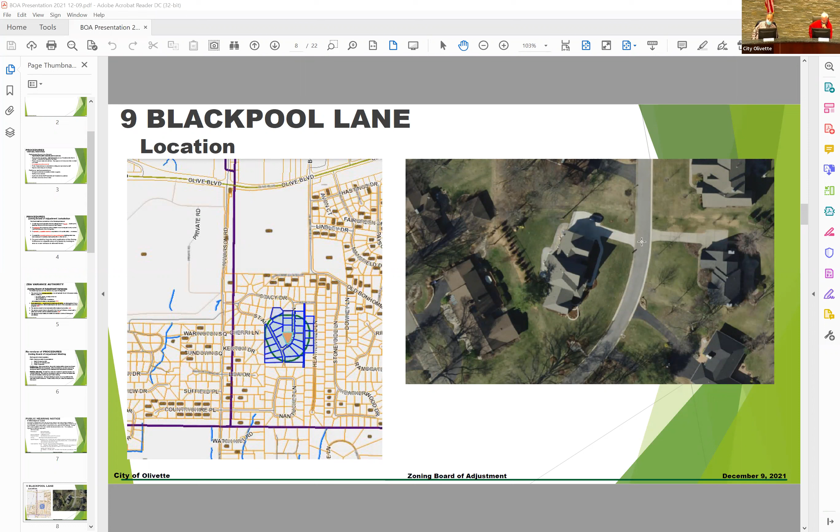We received a building permit application for the construction of an in-ground pool and some other improvements in the rear property. When reviewing the in-ground pool based on the calculations for the required side yard setback, the pool has to meet the setbacks applied to all structures on the property, whether flat or three-dimensional.

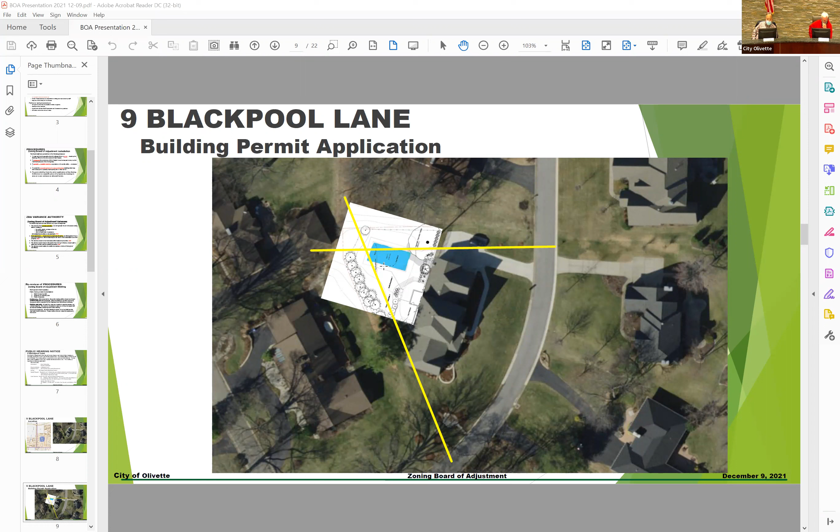So, giving an overview of why the city denied the pool permit request: the property is zoned single family residential district, and the intent and purpose of that district is for single family uses. But there are some definitions that are important in the evaluation.

One is setbacks, defined under Article 2 definitions within Chapter 400 zoning regulations. A setback is a requirement for where a building or structure may be placed on a lot, establishing a distance from the front, side, and rear lot lines. The land area within the setback establishes yard areas kept free of buildings and structures. It is also referred to as setback requirement or setback line.

Within a setback there is a side yard, which is the linear setback from the side lot line established in the underlying zoning district, in this case SR. Unless noted otherwise, no building or structure is generally permitted in the side yard setback.

Another definition worth noting is lot width, because we use the lot width to determine the size of the side yard setback. On an interior lot, the lot width is the horizontal distance between the side lot lines measured along the established building line from the front lot line. On a corner lot, you use the shortest distance to determine the front yard, using the distance between the side lot line and the street to make that determination.

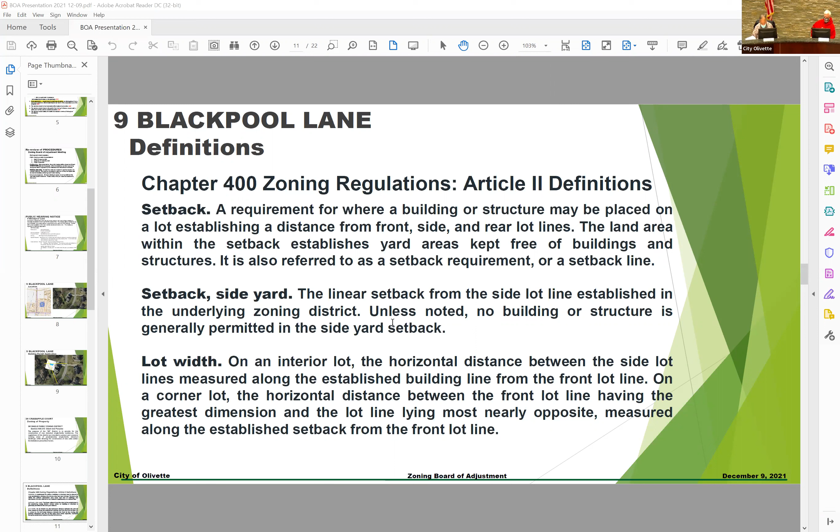In this case, this is not a corner lot, even though it has a configuration that may reflect that. When I measure the lot width, I measure along the front building line from property line to property line, and we'll show you a little illustration that identifies that, as required by code.

The sections applied when we assessed the pool are section 400-260, the yard and setback requirements. The minimum side yard setback is 12% of the lot width. For pools, which are considered accessory structures, the side yard should be no further than the side yard setback of that lot.

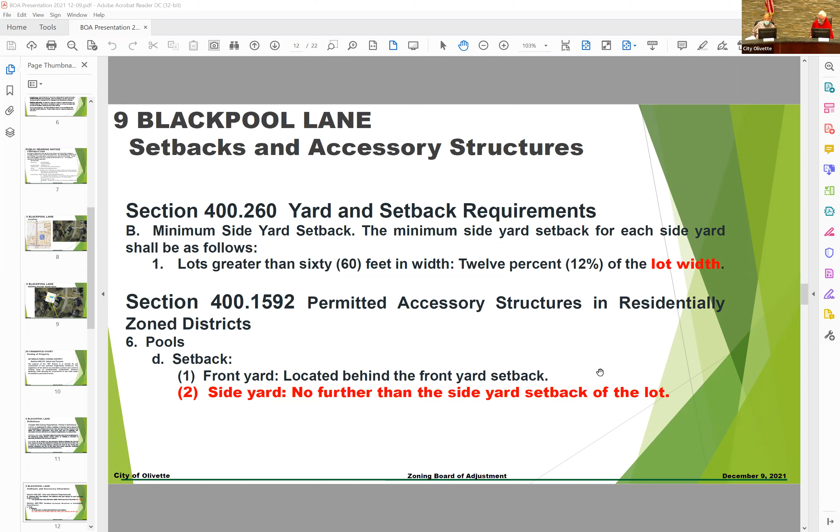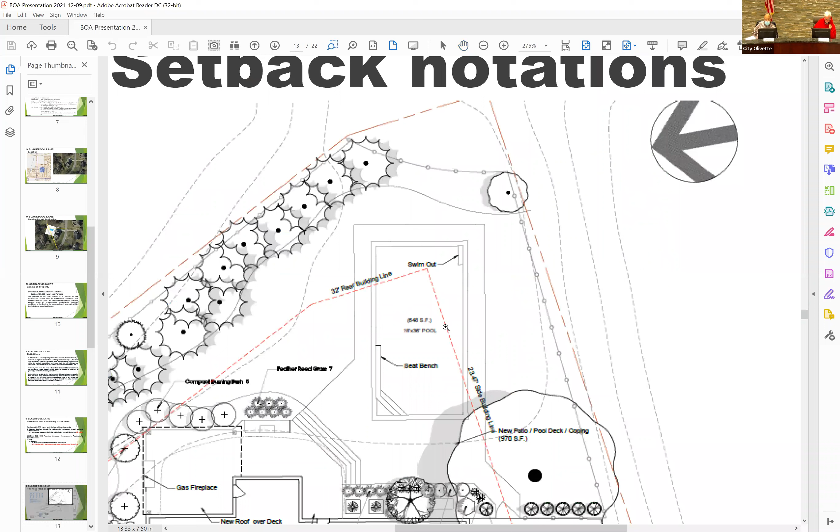Then you'll see these red lot lines that represent the setbacks, and you can see how that pool falls within the calculated setbacks here for these side lot lines. That being said, staff did not have authority or any authorization to issue the building permit to allow the pool to encroach into that setback area.

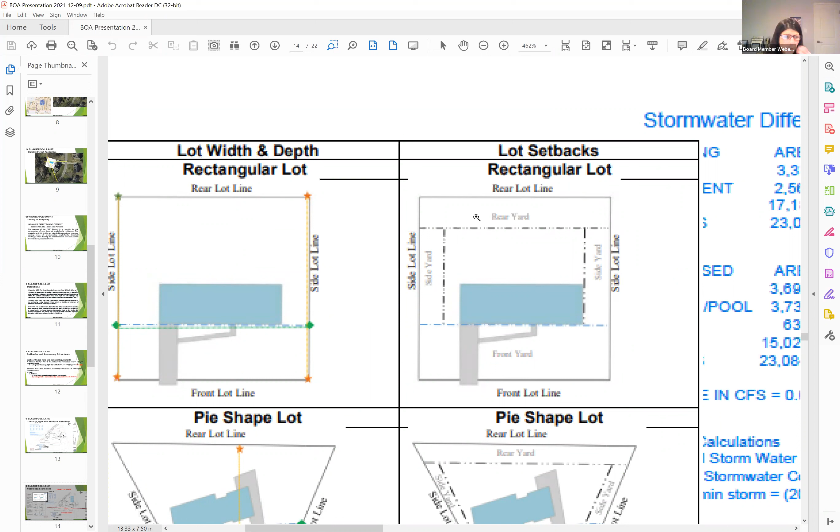How are those setbacks calculated? Based on the code, we give a lot of guidance to applicants as they come in. The typical setbacks we usually see are for rectangular properties, where you measure the distance along the front yard line from side property line to side property line and apply that percentage. So on a rectangular lot, typically about 100 feet wide, you'll get a 12-foot side yard setback.

On a pie-shaped lot, you may get something even less than the typical 100-foot-wide yard. On a corner, you get the advantage that you could use the distance—you're still looking at a four-sided property—and you can use the distance of the shortest street side of the property.

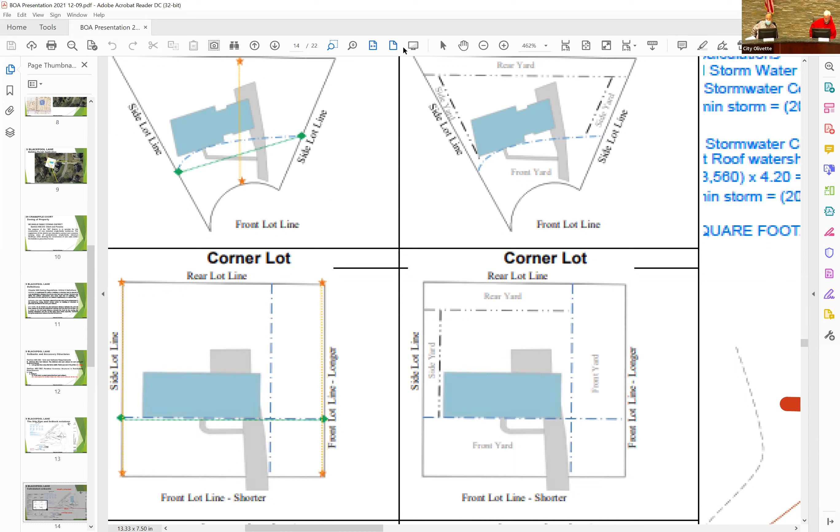A typical lot in the SR district will be 100 feet wide and will have a 12-foot side yard setback. But given the configuration of this lot, and by code of how I have to measure that distance, the lot width comes out to 195.6 feet. I multiply it by 12% and apply 23.47 feet of side yard on each side property line.

We talked with the applicant and looked at other options and spaces on the property. They were advised that every once in a while staff believes you have these unique lots, and that's what the board process is for. We advised them that if they wanted to pursue the pool development as is, it would be best to petition to the Zoning Board of Adjustment.

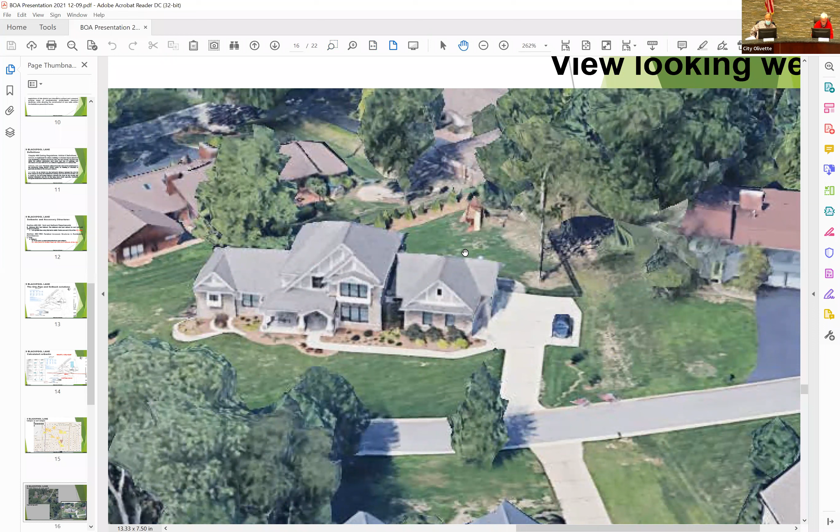Here's a view of the front of the house looking west, and this is where the pool area would be, back in this area. You can see they have a berm and some landscaping. You can see the neighbors, again with shorter setbacks, already have structures in place and improvements that are closer than the 23 feet that would be applied to this lot.

So that concludes the role. We denied the permit for the purposes of the calculation, based just on looking at how I have to calculate that lot. I have to apply that 23.5 feet, even though the property has a unique shape—it's twice the amount that is the minimum that the code would apply.

And even though it's a flat structure, the pool—the in-ground pool—is considered an accessory structure subject to the side yard setbacks, whereas, let's say, if it was a patio, a driveway, or a sidewalk, it could be built closer without any variance requests, as you can see here at the lower right-hand corner.

So, Chairman, that concludes my presentation. I'll be glad to answer any specific questions, but if I can enter a couple of items into the record just to make sure that they're there. Please do—and that is our findings.

The property is zoned SR, single-family residential. It's legally known as Lot 48 of the Heather Hill First Addition subdivision. The current home was built in 2015, and I believe the current owner purchased the home that same year. It's a legal lot of record. It has well over 20,000 square feet, has plenty of width, but it is unique in shape.

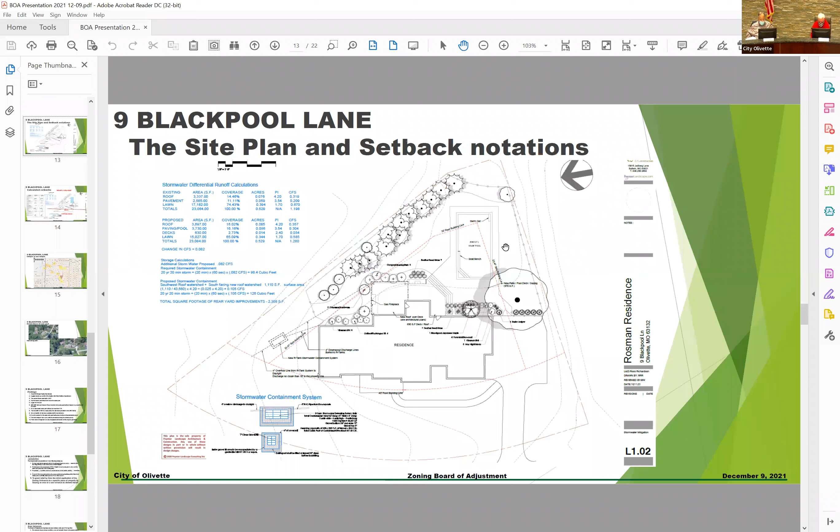Go to the yellow, to the aerial, right there. One second, sir. I'll try this one first, and then if we need to move. The pool area is right in these grounds. So here's a home along with some improvements, there's another adjacent home here, and then their neighbor to the north here. I'll show you the other one just in case there's any difference. You see the neighbor's home to the north here, and the pool area would be in this area.

Any other questions for Carlos? All right. Would the applicant like to come up and be sworn in? I'll let them speak from there. That's okay, great, that's perfect. You don't have to move.

Now, one thing we didn't consider was... that's what I was wondering. One of these... HDMI? No, no, I'm sorry. Sorry about that, Chairman. You're fine.

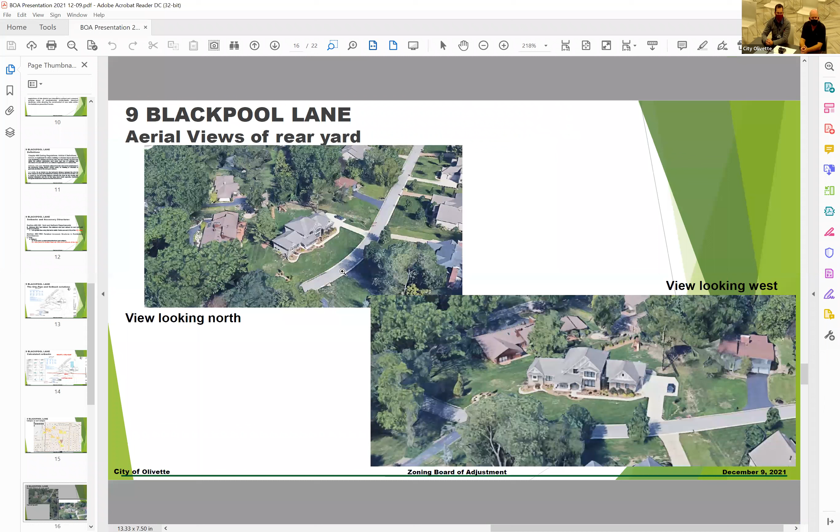This, we understand, is a pretty standard size of a pool, I think it's 16 by 36. The part that's highlighted is the patio around it, which is flat, so it doesn't fall under the same jurisdiction. Making it smaller is something, if you were to deny the variance, we would talk about as an option, but we have 3 kids, we envision having pool parties with their friends, and a larger pool is better for giving people room to play. So hopefully this size, which is a standard size, is going to be okay to do.

Okay, just to clarify, how many feet from the far rectangle side to the red point where it would actually meet the guidelines, how many feet would that take off the length of the pool? Is that like 5 feet maybe, if that's a 30-foot long pool? You're looking at about 6.

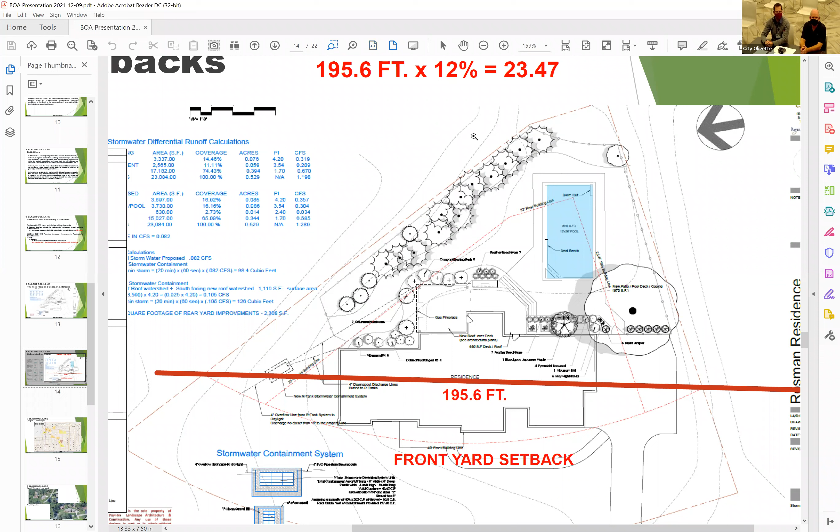6 feet, okay. But I think then you'd also have to move the pool to the side because of that whole diagonal, so that the pool really would have to... and also you wouldn't be able to cover the back lot, that side lot as well. So I think it's really challenging to decrease. You would lose almost half the pool, I think, if you really tried to move it around.

Because that whole dotted line, shortening it a bit and then moving it over a bit doesn't completely fit in the red dotted lines, but I didn't know if you played around with that at all. I've tried, I'm not an architect, but I tried to put this in PowerPoint and get the sizes and the rectangles and kind of put it at an angle, try to fit it. But as soon as you start doing that, it starts looking kind of strange in terms of the lines it creates with the rest of the property.

Yeah, I don't mean angling it, I just mean shortening it from 30 feet to 25 feet or 20 feet. Yeah, it's not something I was able to figure out how to do, but maybe that's just a limitation of my design abilities. Okay. I know that when Poynter looked at it, they said there wasn't really a good way to do it.

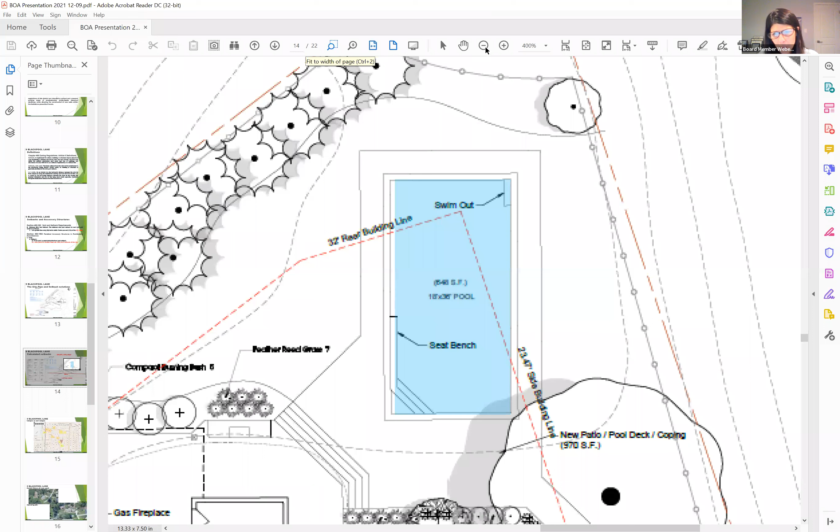I'm not sure, what are those steps on the home, or is that the design of the patio that will be there? Yeah, right in that area, that diagonal. That's the deck stepping down towards the pool. Okay, that's a deck, okay.

I mean, unless the pool was a smaller rectangle and not so much over the red lines, otherwise there really isn't a good place to put it. It's just a matter of whether they'd make it smaller a bit. I don't know if that makes sense.

So I'm just kind of struggling with the point about it being peculiar and exceptional practical difficulties for the homeowner. I understand exactly what you're saying, and I tend to agree. I do think this lot is very weird, it's not something we typically see. I mean, I would be inclined to grant the variance, but...

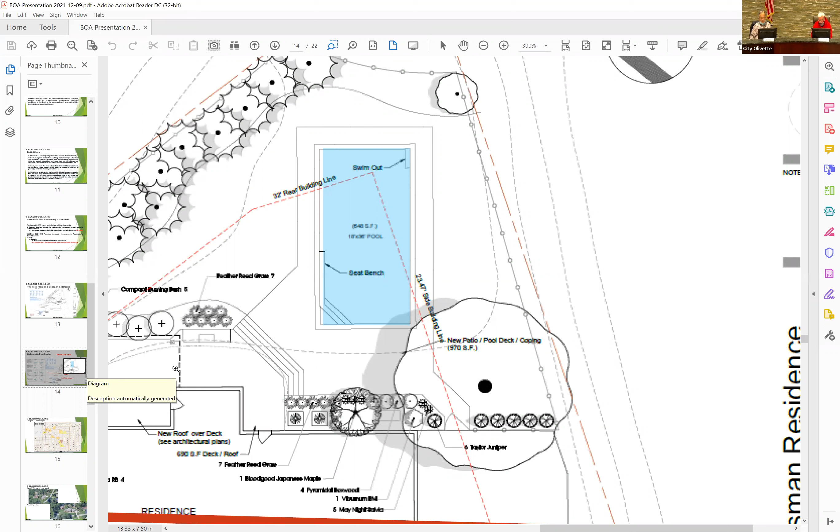What if we took off... Carlos, is there any way of telling if you cut the pool down 3 feet? Is it gonna make any difference?

No, and that's one of the things maybe I didn't stress enough, because I know a lot of times the board looks at whether there's available area, whether there were other options. But a pool isn't a fundamental right. They have a right to build a house, and that house can still function with or without the pool.

One of the things here, as we did the analysis, is because of the way the zoning definitions are written and that setback is applied, the bigger question is whether the requirement for a 23.47 foot setback is equitable and compatible with what's applied to all the other lots. Their neighbor could have a 100-foot wide lot and have a 12-foot setback, but because of the conditions of this property and how those calculations have to be applied, I don't get the flexibility of making a judgment here.

Is that... I had to apply almost 2 times the setback that would apply to a traditional lot. And really, that's the core question: is that a reasonable setback, when a neighbor may have a 12-foot setback?

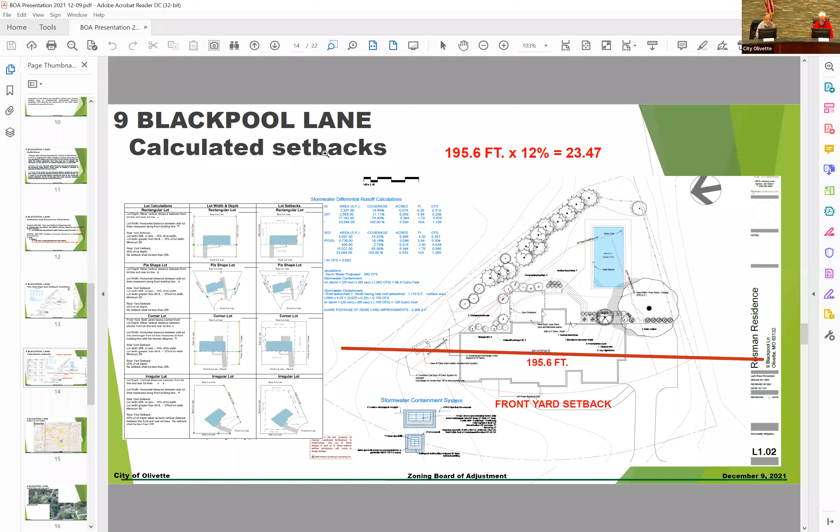Okay, so would somebody like to make a motion and let's see where we're at? I'll make a motion, but I don't know how it should read. Do we have it written down? Yes, it'll be in your staff report, I believe. And I'll see, I do have it on the screen. Bear with me one second.

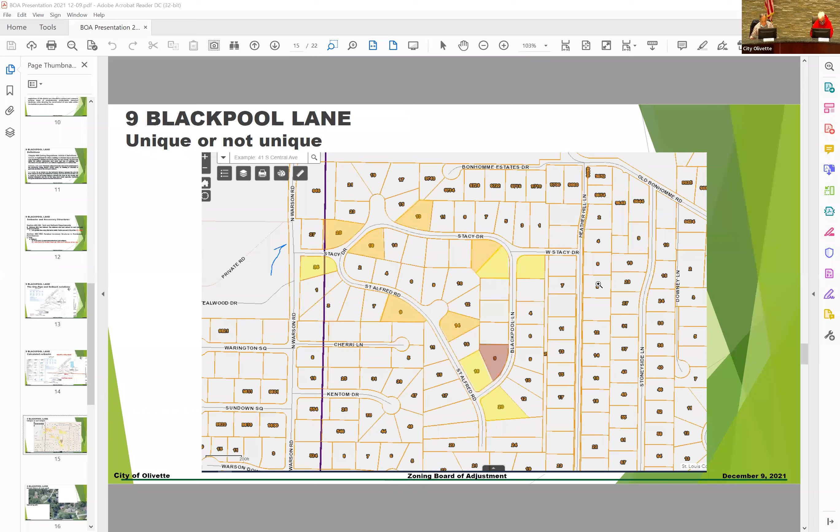Okay, again, all motions are in the affirmative or should be made to grant it, and then the vote takes place. It does take a full consensus to authorize an appeal. It should be on your monitor now.

The motion to grant a variance to permit minimum 12-foot side yard setbacks under section 400.260 for the property addressed as 9 Blackpool Lane, to permit the construction of an in-ground pool as illustrated in the plans dated October 11th, 2021, prepared by Pointer Landscape, from the north and the southwest side property lines.

Do I have a second? I'll second. On a roll call vote.

Board Member Weber, yes. Board Member Malik, yes. Board Member Cicero, yes. And Chairman Gerstein, yes. The motion is granted unanimously, 4-0.

Thank you all. Thanks so much, guys. Thank you. Thank you. Thank you.

Any old business, new business? No, nothing additional. I do have a request to schedule a meeting on Monday, December 27th.